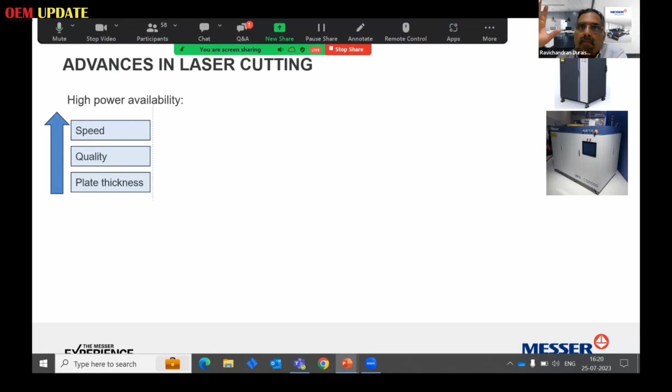I was telling you about high power availability and how it's changed the cutting process. Take mild steel, for example, 10 mm thick. The cutting speed was around 1.5 meters per minute at 3 kilowatt, which we experienced maybe 4 years back. Now we have the option to go up to 12 or 15 kilowatt. For example, with 6 kilowatt you jump up by 47% over 3 kilowatt. And when cutting a 10 mm plate with 12 kilowatt, you jump up by 173% over the 6 kilowatt speed. So cutting is done at high speed, meaning more productivity and better quality.

Another benefit is higher plate thickness capability, and this advancement comes from higher powers. Then there's air cutting, using air as the cutting media. They can cut up to 10 mm, increasing speed nearly 3 to 4 times, like how they cut stainless steel. So production is high.

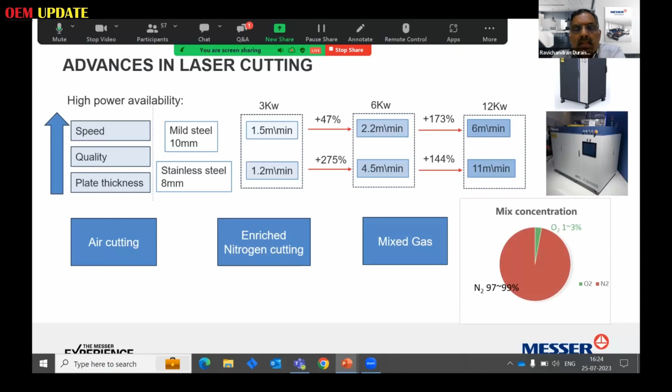And there's enriched nitrogen and mixed gas, a new technology where oxygen is mixed with nitrogen at a percentage of 1 to 3%, depending on plate thickness. With this, cutting speed is higher, quality is better, and cost is very low. Cutting with pure nitrogen has more cost involved, but cutting with mixed gas, a combination of oxygen and nitrogen, makes your cutting cost very, very low. So the advances in fiber laser bring high productivity, high quality, and low cost of production. This covers the advancements in laser cutting technology.

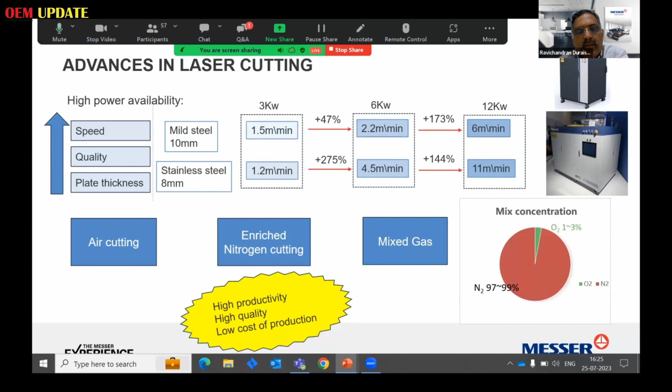Just to give you an overview of what products we at Messer offer for the laser cutting process: we have 3 standard format machines, starting with Fiber Light for low power up to 3 kilowatt, then Fiber Blade 5 for up to 12 kilowatt.

Then up to 20 kilowatt, we have got the fiber blade 6. All these machines come with a state-of-art Messer controller with all embedded laser features. These are the normal machines which you see in the market.

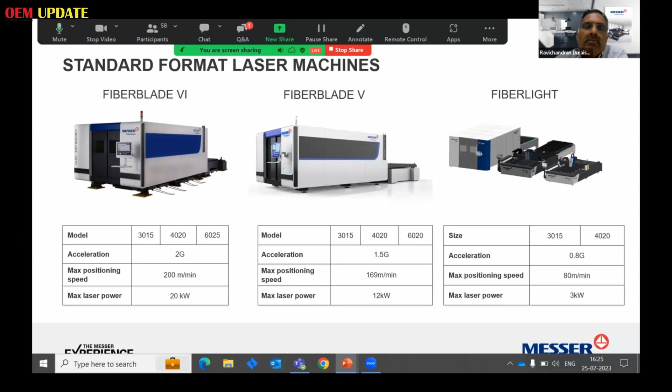We too have the gantry machines, in which lasers can be used, and the widths can vary up to 5-meter cutting width for a length of around 32 meters. So you can use 12-meter plates to cut also.

The other thing is, in these machines we can have laser beveling. I think no other supplier in India supplies laser beveling, because whenever a plate is cut, generally it is beveled for a welding requirement, for the welding operation. Normally what people do is cut the plate and then do a secondary operation. But with our machines, you can do the beveling operation on the machine in one go.

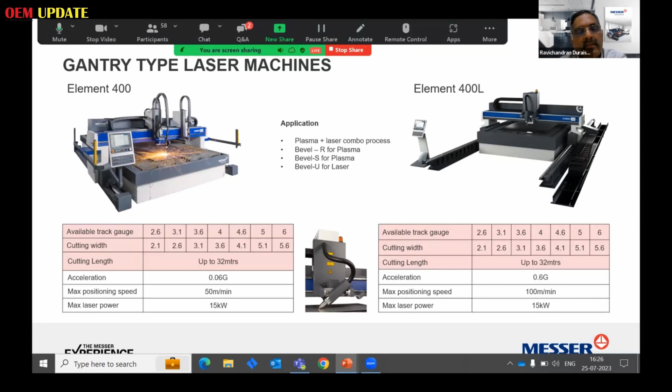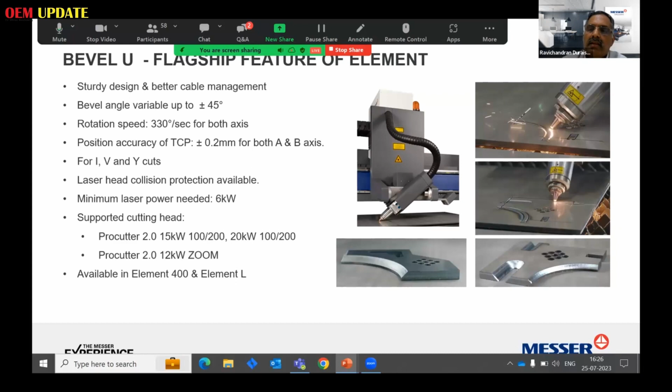So these are the advancements in laser cutting technology. This is just to tell you about the bevel cutting option in laser. We have named it Bevel U because of the arrangement of the equipment, where you can cut up to 45 degrees, plus or minus 45 degrees. These are some of the pictures of the bevel cut samples.

Then coming to automation, like I've told you, laser has evolved over a period of time as a major cutting process, eating into the oxy-fuel and plasma cutting market. It's literally taken over the plasma cutting market totally, and it's available like a commodity.

So all these things can be improved. The productivity can be much improved by automation on these machines. If you really see, we have now got highly productive machines, and the manufacturing process in many industries across the industry is going towards lean.

Lean means huge batch production is not the norm now. It's small quantities, much needed quantities only. So what happens is frequent change in setup, frequent change in the loading material type.

So all these things bring about a lot of manual intervention other than the cutting. When a lot of manual interventions are there, you will have a lot of idle time with the machine waiting for material. So with automation we have to address the idle time, limit it to the least possible extent.

Then the next one is, whatever you have done, your process needs to be optimized. Not just the machine, the material flow and the requirement, material stocking, and the parts to be supplied to the next machines - all this has to be optimized. So you need proper scheduling.

If it's manually done, you'll have a lot of issues like errors, rejections, waste. So if you have process automation in the process optimization, that will be much useful. And lead time.

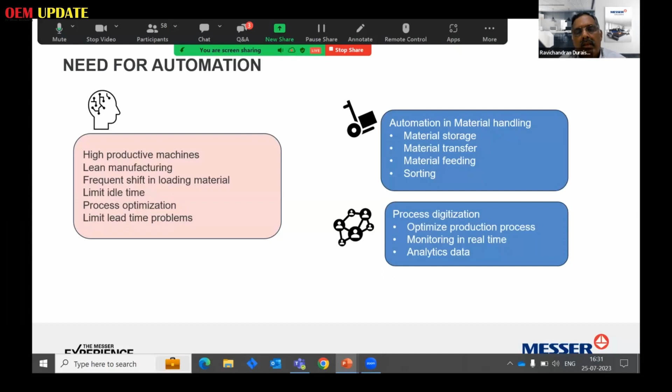And once you're done with the production, you have to analyze the data so that your future process can be still streamlined. So two areas where we can automate are material handling and process digitization. First, let me talk about material handling, and then second, I will talk about process digitization.

So these are the benefits. I'll just breeze through because I will explain it in detail at the end.

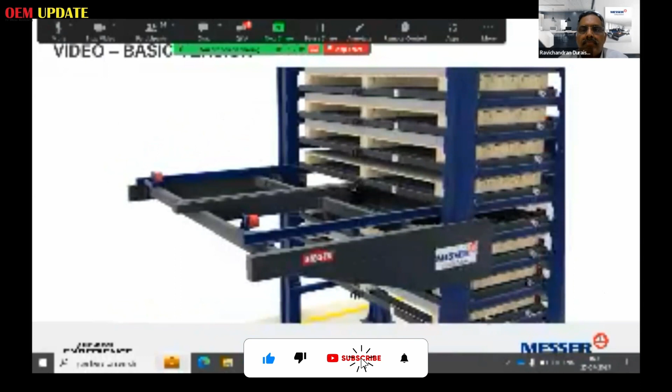So material handling, I'll just run a video so that you know what we are talking about. So you're getting the raw material. You can store it on a vertical storage, which can save space. And when you're doing all this, you're planning where to put the material. So there's a lot of planning on material movement also. So if planning is there, then you are going to optimize.

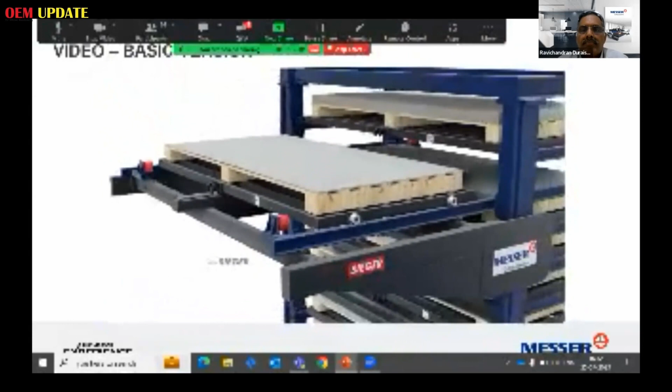So now I'm taking out a pallet on which the plate is there, which is to be fed to the laser cutting machine. So it is brought to the other side of the tower, storage tower, and then it's stacked in place, which we call the transfer station.

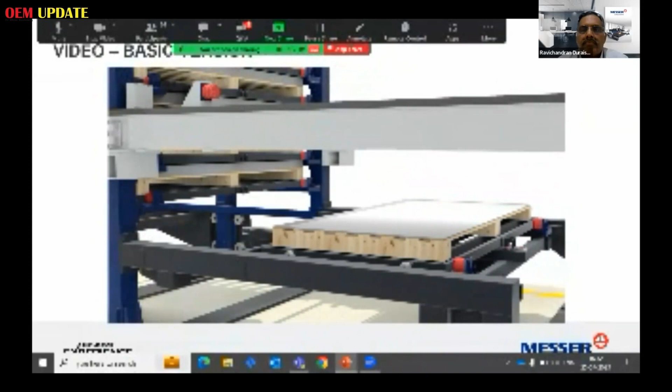Now coming back to the machine. So a cut part plate has come out, and we have got an automated fork structure which lifts the cut part and unloads it to the place. Here we have shown a pallet. It can be a pallet, it can be a conveyor, it can be a trolley, whatever it is. Which I will explain to you in the next slides. It drops the cut parts and then picks up the fresh sheet and loads it on the machine.

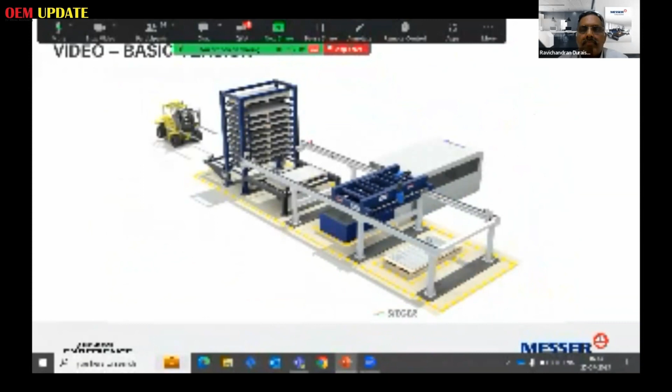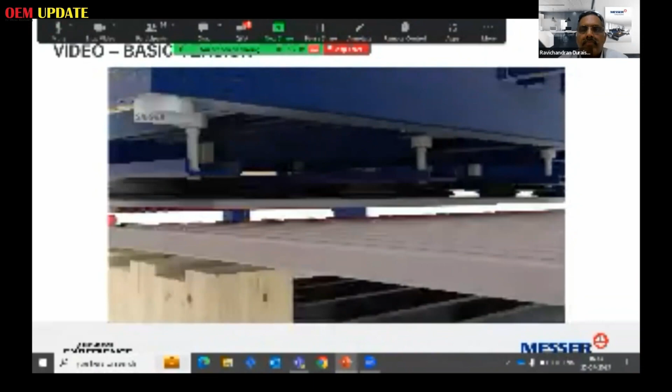This is called a typical example of material handling and feeding system. So we call it a loading and unloading with a storage tower. This is not one type of system - this is highly configurable based on the customer's location, customer's requirement, and how their machines are placed. So it depends on the number of machines.

It's one machine, so a fresh plate is loaded. And since this is a shuttle type machine, you have another plate already inside. So this is a whole gamut of the productive type of material handling system. So in the center, you have the cutting machines. Normally what they do is by forklift or overhead crane, people load the material onto the machine, then take the cut parts out on their platform.

So if this is unmanned, how does it happen? We have a vacuum lifter and a comb unloader. This is used to pick the plate and load it on the machine, and this is used to pick the cut parts and unload it on the station. So in between, we can have a storage tower where these plates are stored and taken out when we need the plates to be loaded onto the machine.

Or else you can have a cart - two carts going back and forth. One is used for loading and the other one is used for putting the raw material. Or a station just like that. So all these things I will explain, and this can be two different elements, or it can be a single unit like what I showed in the previous video.

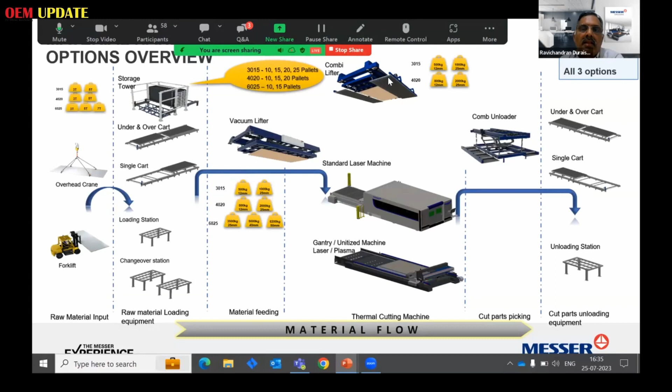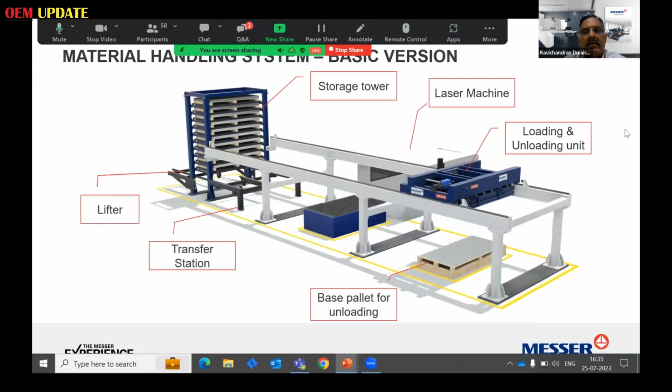I have different videos, but I don't want to take much of your time. And these are like, you have separate loader and separate unloading station. This is the tower - this was an example. And this is the system which I showed in the video.

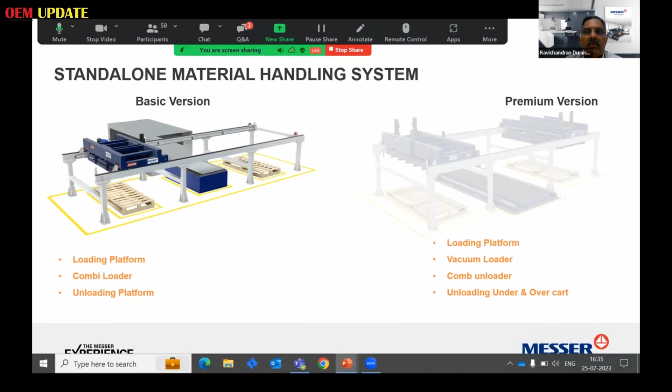In different configurations, you need not have this tower, you can have just a pallet. This can load and unload over here. So you can have the loading and unloading separately. You can have a cart so that you don't enter the place where the loading is happening. So a lot of configurations.

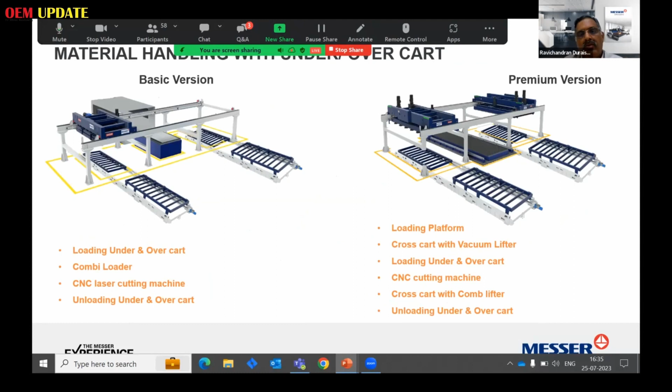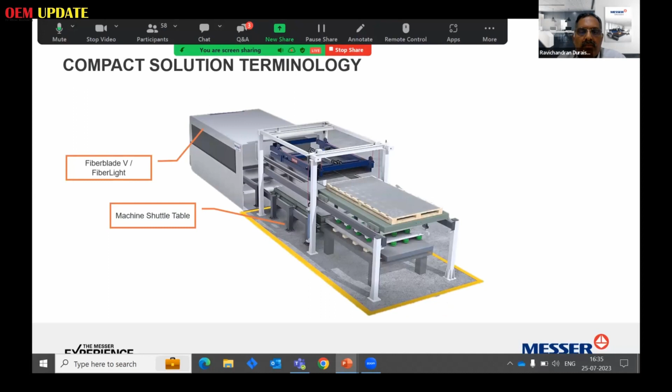So you have the compact version also, wherein a single machine, on top of it you have a loading unloading system, very compact and low cost also. It's like this - just a video to show you this.

So these are the fresh plates. Now this comes and picks the plate, and the cut parts are picked by the comb thing simultaneously.

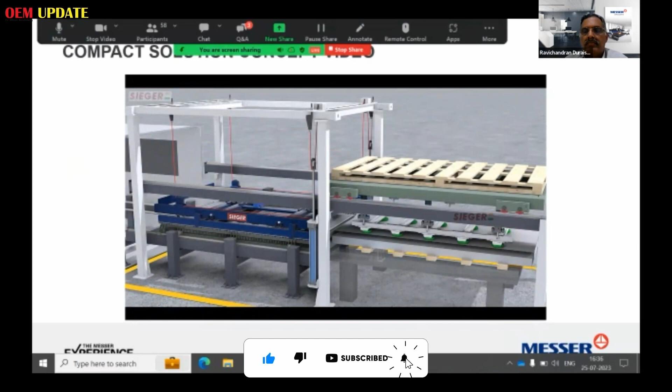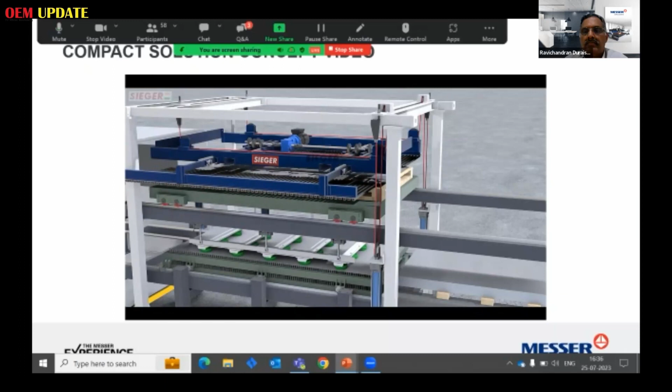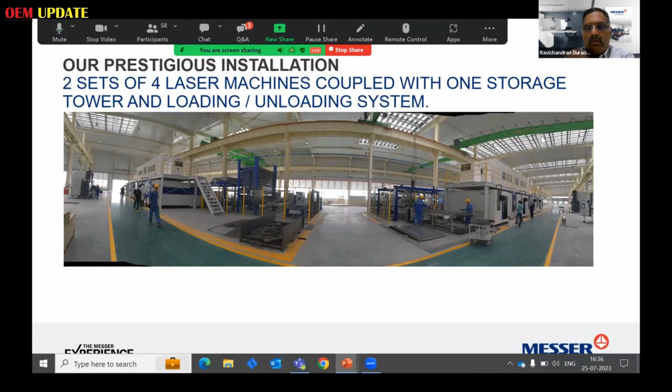So I'll just breeze through - these are different types. So we don't have much time. So we can have a vertical storage also, like 4 machines running with one single loading unloading station, like what I have shown below.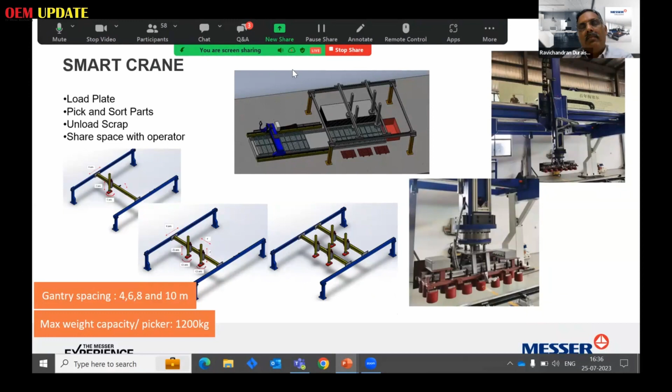So automation helps in a lot of ways. And smart crane - like after you cut, you can pick your plates and store it. After it's cut, you can pick by the pickers - it can be single, multiple. So you can pick and put it over here so that a man need not interact with the machine at all, physically. So after the plate is cut, it picks the cut plate and puts it over here.

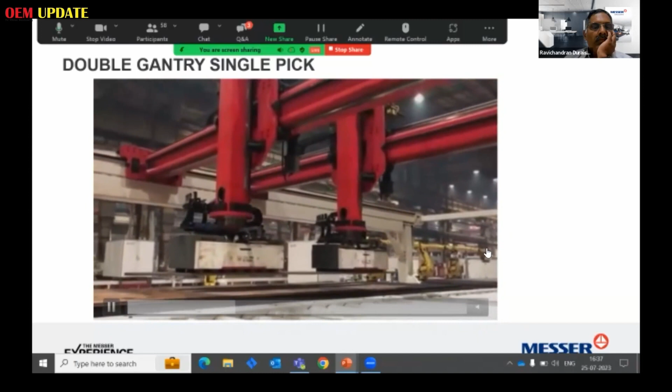So the next stage of improvement in the laser cutting industry will be automation of the laser machines. So I just breezed through. Then process digitization - I was telling, one type of automation is on the machines, on the physical material loading and unloading or handling.

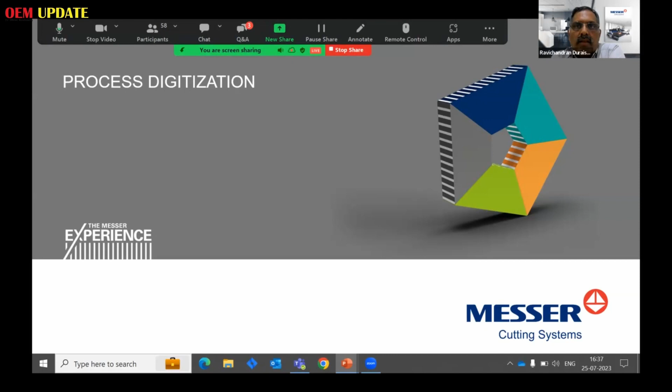Now it's in the process. So why this process automation?

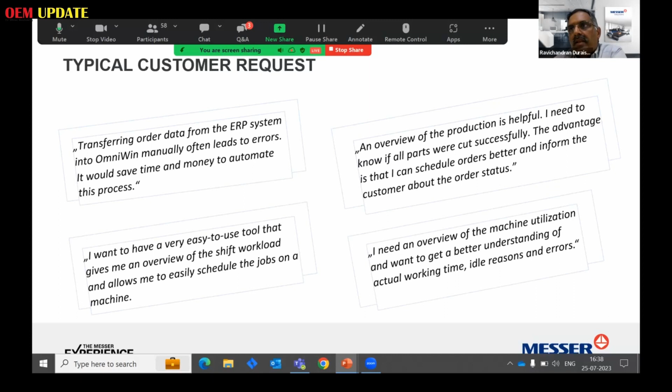A normal question customers ask is how to transfer data from the ERP system without manually entering it into the production system. How to do it automatically. That's one thing. And what is the overview of production? How do I know what is being cut, what is being processed? So all these things, how can I schedule it automatically? You have two or three types of machines, and how do you schedule it so that each machine doesn't wait for material? So there's a smooth flow.

So it's like you have the data coming from the ERP, then you have a scheduling for the machines. Then from the machines, you take up the data of what is being produced and give it back to the scheduler and the ERP system so that automatically the stock of the cut parts or the processed parts are added. So there's no human intervention.

It's done automatically. So we have an ERP connect, a job scheduler, and a PDC, or process data capture. We call it PDC in our offering. So it's an OmniFab we call, and we also have a machine insight, which gives live machine data, whether it's working or idle, how many idle hours it has kept, and what errors have popped up. These are the inputs for the machine to get enabled to Industry 4.0.

And this machine insight gives the data not to the operator alone. If it's connected to the internet, then the whole management can look at it on their mobile phone or computer also. So they know what's happening right down in the shop.

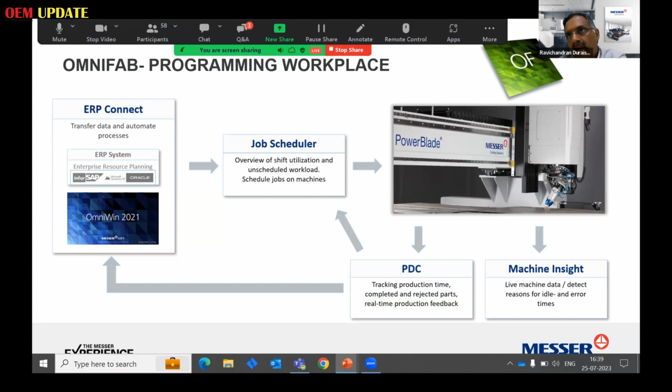So we have for nesting and digital automation, it's like this. Now the ERP, then automatically you can give quotes, then job management and material flow can be managed, and PDC is getting information from the machine, and machine insight is for real-time information on the machine's utilization, idle time and errors - what types of errors have happened, or if the machine is idle, why it has been idle. So all this data is available and you can analyze that.

All this will enable us to reduce the bottleneck. It will show the bottleneck in advance, and on time you can ensure that your on-time delivery is really happening, and high transparency is there.

So if there's manual collection of data, there's literally very little transparency. Now anybody who has the system can look into how the machine is performing.

So these are the two types of automation. One is the process automation and the material flow automation.

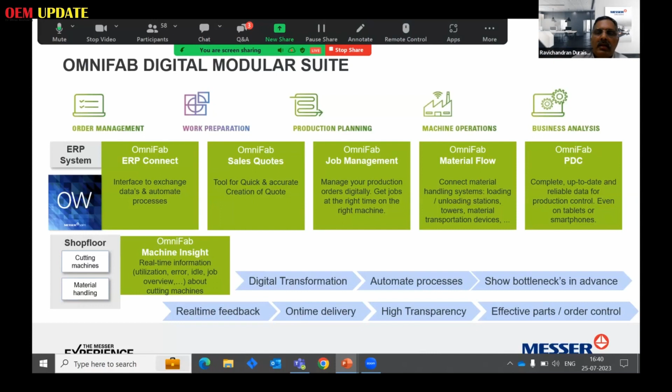So what are the benefits of that? Increased productivity - your machine can run 24 by 7. If it's running 24 by 7 non-stop, it increases productivity. And then low operating cost, because the machines are efficient enough, as they replicate the action over and over again much better than a human. So you have less labor cost and fewer errors, and material waste is also reduced.

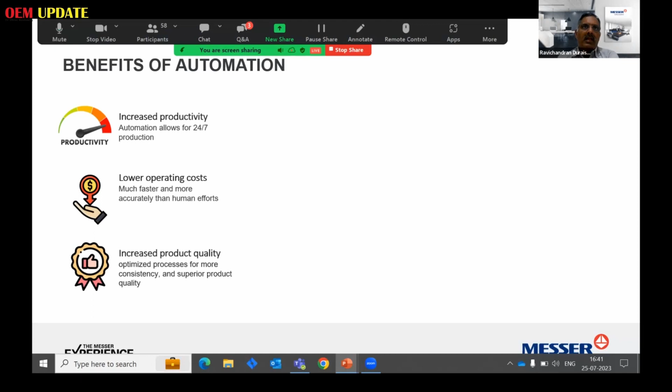So an increased product quality, because your machine, when it is loaded by a material handling system, handles it accurately. The material is not tampered with, and there is consistency. So in the handling system or the finishing system, your quality is also ensured.

Then it increases worker safety, because on the physical front, a man doesn't approach the area where the machines are operating. So it's very safe for the human.

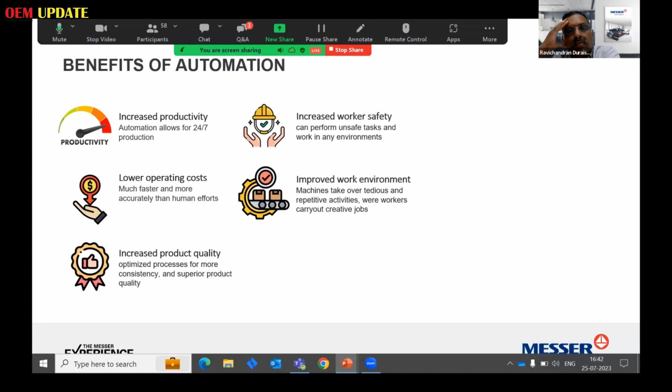And then improved work atmosphere, like the machine takes over the tedious work, whereas the human takes over the creative jobs, and planning and execution is done by the machine.

And then better use of floor space, like when you store vertically, you get more space for other machines.

Okay, so easy integration - nowadays all the material systems and digitization systems have become more flexible and more easily adaptable with many systems. So it can be incorporated on existing systems too, which helps availability of automation on existing assets also.

And then since storage can be done vertically, and effectively loading can be done, there's a reduction in waste. So energy usage is optimized, and all this translates to a lower carbon footprint.

So automation in any industry gives you all these benefits. It's a generic type of benefit. And especially in the upcoming market of laser, which is growing year on year by 30%, these are profoundly seen.

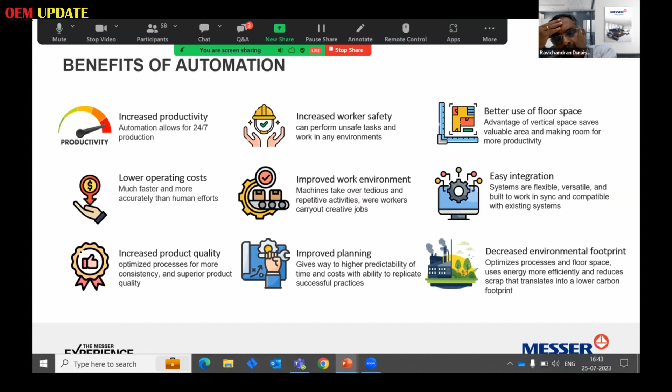Okay, and this is the end of my presentation.